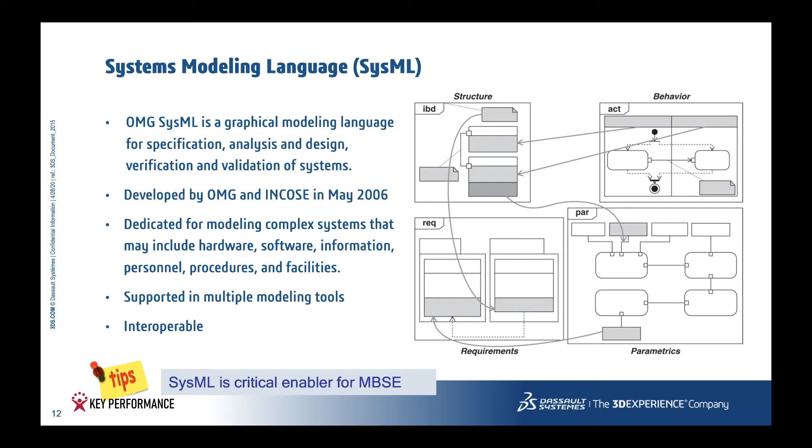And the Systems Modeling Language is the graphical modeling language for specification, analysis, design, verification, and validation of systems. It was created in 2006. It's dedicated to modeling complex systems; whatever falls under the definition of system can be modeled using Systems Modeling Language. It's supported in multiple tools, it's interoperable, and according to INCOSE, it is a critical enabler for model-based systems engineering.

The language consists of 9 types of diagrams and is also categorized into 4 pillars. If you look at what the pillars are, they are structure, behavior, requirements, and parametrics. Let's look into some of the diagrams. Internal block diagram, state chart to define the life cycle of the block, requirements, in this case captured in the tabular view, that's also part of the standard, and parametrics, which is used for mathematical calculations.

So breaking the myth: SysML is too complex. There are many people saying that SysML is too complex for their daily engineering activities. But first of all, we need to understand a couple of things. First of all, SysML is the modeling language only, so it needs to be combined with the methodology to be useful. The other thing is that no open source tool can provide usability equal to commercial SysML tools. So if you apply open source tools, you don't really have the experience of the commercial SysML tool and how easy it is to build models in one of the commercial tools.

SysML is a formal language, so we have to understand that it's not comparable to PowerPoint and Visio. So if we want to keep some level of formality, we need a little bit of complexity. But again, it depends on how precise the models we want to build are at the end. It can be very precise, it can be less precise. It really depends on which level of the systems engineering lifecycle we are at.

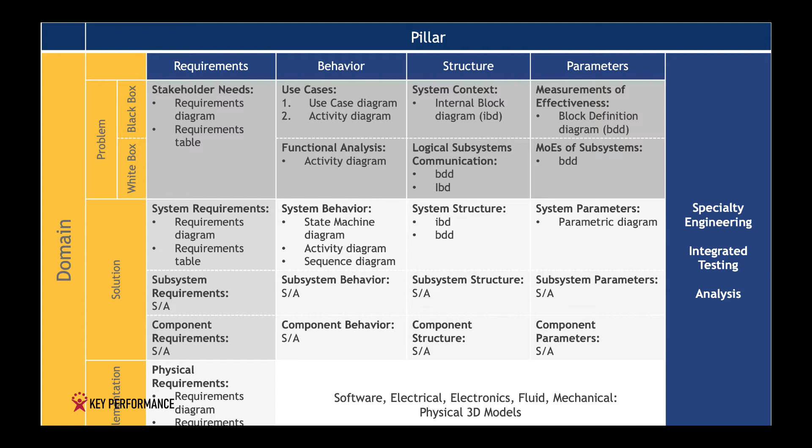And you can see they're repeating because we have, as I said, 9 diagrams in SysML. And it's really important to say which diagram goes where and which diagram we use for what purpose. Because otherwise you can really get lost and start using wrong diagrams for the specific need that you have. So it's important to understand which diagrams we're using for every cell in the grid. And we will, of course, cover that in this webinar.

So first of all, let's talk a little bit about problem domain. We'll start from the black box. The black box analysis is really when we talk about the system as a mystery box. So we don't know yet what's inside the system. And our goal here is to understand what are the main stakeholders, how is the system going to interact with

the environment. We have actors, we have users, we have influencing factors like climate, for example, for some systems, or the road for systems like a vehicle. So we have to take all that into account, and we have to define how all those external entities interact with the system. This is where we really start identifying interfaces. What are the inputs? What are the outputs?

And capture also non-functional characteristics like measurements of effectiveness, key performance indicators, and so on and so forth. Basically, we do what is called and known as operational analysis. Now we will start from stakeholder needs. Well, first of all, the system of interest in the small example is a vehicle climate control unit. And there are a couple of stakeholder needs for the climate control unit.

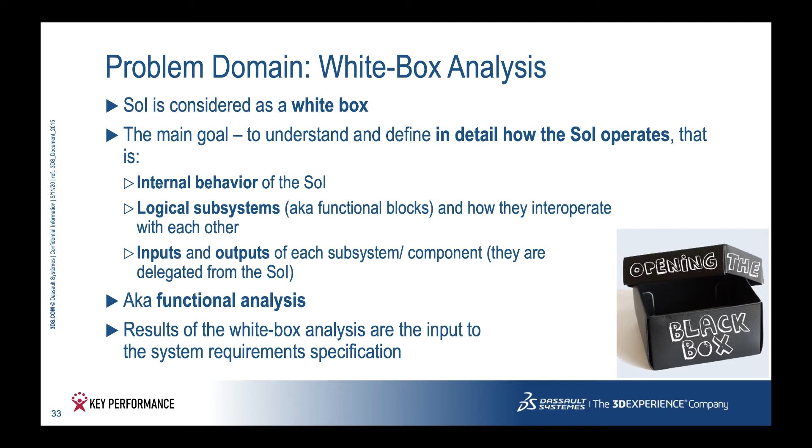Then we go into white box analysis, and this is where we open the black box, this mysterious box, to see what is inside and to start talking about the internal behavior of the system of interest. Start talking about the logical subsystems. So really we define functional architecture, we define logical architecture, and we define the interfaces between the subsystems of the system of interest. And of course, we go and refine measurements of effectiveness. So we assign different measurements of effectiveness or measurements of performance to the subsystems of the system.

And this is where it's important to be consistent between behavior and structure. So we have to make sure we are talking about the same level on the behavior side and on the structure side. So the system use case is related to the context. So a different system context can have different use cases. The system in context can be imagined as different situations in which the system is operating. So if it's a vehicle, for example, it can be in maintenance, or it can be on the road, or it can be in the garage. And these different situations have different use cases.

And then going further, we have the core level functions, and they are the functions of our system of interest in that specific context. Then we go further down, we have sub-functions, we have also subsystems, and so on and so forth. Just we have to make sure we are not going into very deep details. We don't need to go to the physical components here. So we just identify what are the main functional groups, so-called logical subsystems. Some people call them functional blocks in our system. So this is where we start from functional analysis.

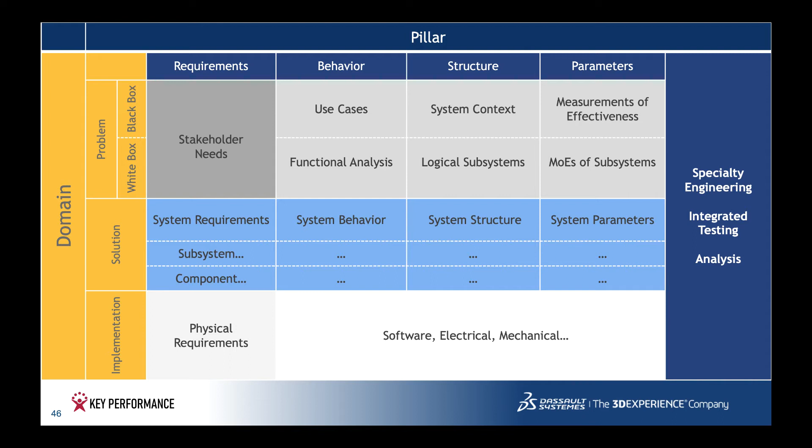Then we go to solution domain. Again, as I mentioned, there can be different organizations working on it. There can be different departments working on it. And this is where we can already start doing trade-off. And this is where we start going more precise. Okay, we're not going physical yet.

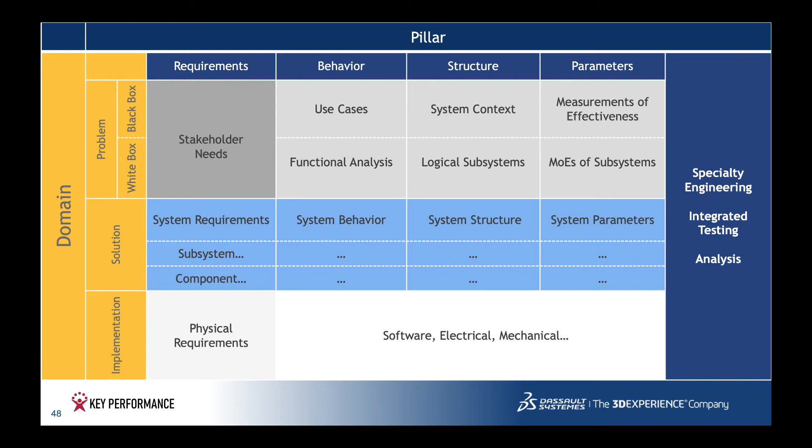So it's very important to understand we are going to create system architecture here that corresponds to the problem that we defined. So from the conceptual, we're going more logical and we're providing more details. And of course, this again helps us to find the best solution for the described problem. And we will go to the system requirements here. This is where we start.

And the system requirements, they are derived from the stakeholder needs. They also refine model elements in the problem domain. So we identify rationale behind every system requirement, and the system requirements have some characteristics like unique identifiers, and also it's really, really important, they need to be verifiable.

So when we talk about stakeholder needs, they don't necessarily need to be verifiable. Sometimes they are raw information, raw text, which we are working on refining in the model. And when we come up with the system requirements, they need to be verifiable. So they need to be very precise statements.

Looking into the example, we can capture them in the diagram. We can capture them in the tabular form that was displayed before. We can capture them in the graph that I also displayed previously, and we can capture relations to the stakeholder needs, of how system requirements are derived from the stakeholder needs. And of course, we can build a nice looking traceability from the stakeholder needs to the system requirements.

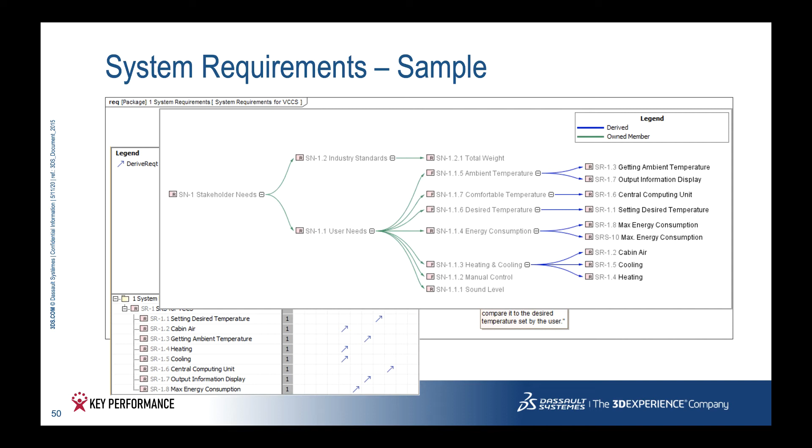And we go to the system structure, and this is where we define the high-level system architecture, which can be different. It can be the same, but it can be different from the one described in the problem domain. In the problem domain, we identify what are the main functional groups, and we treat it as the requirement for the system.

And now when we are trying to propose a solution based on all the inputs that we have, it may correspond and it may not correspond, because additional things may be required, or maybe there's going to be less because some cannot be implemented because of the cost or some other reasons. So really we are proposing the high level architecture in the solution domain.

And here, once we do that, then we start splitting our model into different models for different subsystems. This is where we come up with the work breakdown structure based on whether we are giving it to suppliers or whether we are distributing work to different departments.

So there really can be multiple different situations, but it's important to understand that here we really separate different subsystems into different areas of work, into different projects within the organization. Also so-called work packages.

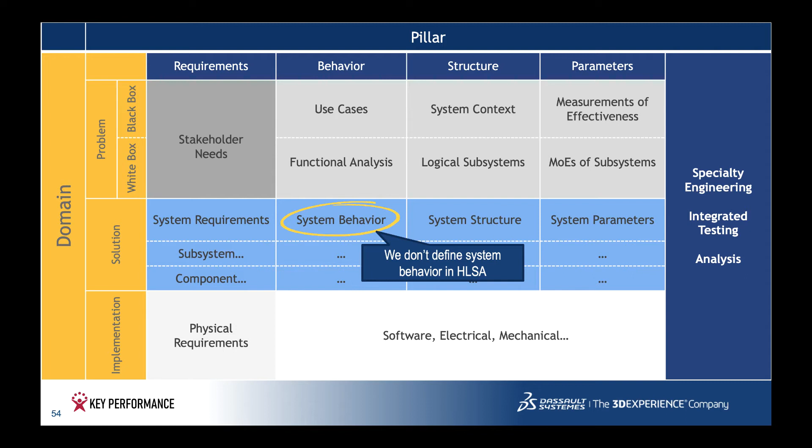So then we go to the system parameters, and at the system parameters, we define methods of how we are going to calculate different KPIs. And we do that in SysML parametric diagrams. So SysML parametric diagrams, they're providing mathematical approaches to calculate the measurement of effectiveness. Okay. And this will be explained in more details when we go to the demonstration.

Then it's important to know the traceability. Traceability is very important all the time. And here we have model elements from the system architecture satisfying our system requirements. So please note that in the problem domain, we are refining stakeholder needs. Here in the solution domain, we're satisfying system requirements. That is an important difference to understand. And this we can capture in the matrix form, where we can say that some interfaces or some system parts or components are satisfying system requirements.

Then we can go to subsystems. The same practices are applied here. We are going into more details, starting from the structure. And here in the structure, we are again applying the same practices. We go into more details for every subsystem. We identify what are the main components, and we go down until we identify what type of components they are. Are they electrical, or mechanical, or software components? And then we can again either choose some components from ones available in the market, or we can contact suppliers and ask for these components. So it really depends on the situation and on the system.

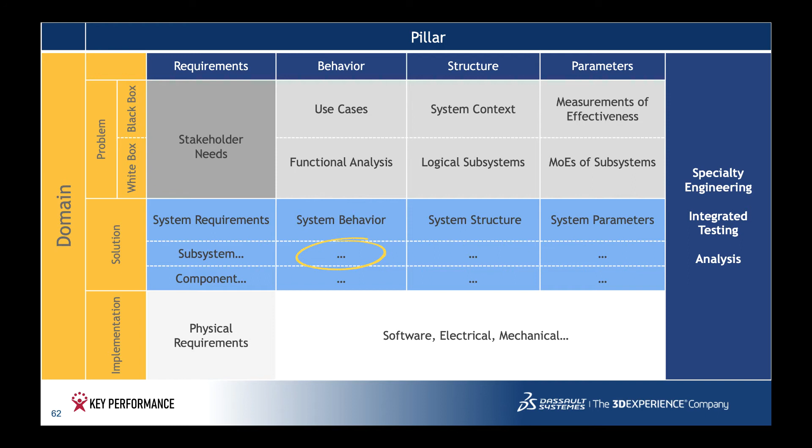Okay, then the system behavior here allows us to define behavior for the subsystems. We can capture it, for example, in the state chart. We can capture the life cycle of the subsystem. At the high level, we can, of course, add some more precise and formal algorithms. We can run simulations. So this is really where we go into more details, trying to understand the behavior of the subsystem or the high-level behavior of components. And if needed, integrate with some more detailed models coming from different sources, like, for example, Modelica, MATLAB, Maple, etc. Now it's demo time.

And it is also time to introduce the modeling software as the third enabler of MBSE, which goes together with the already introduced language and method. Why is the modeling software so important? Because it provides the repository for storing models. Without the repository, SysML diagrams would be just separate drawings, as there would be no underlying model behind them.

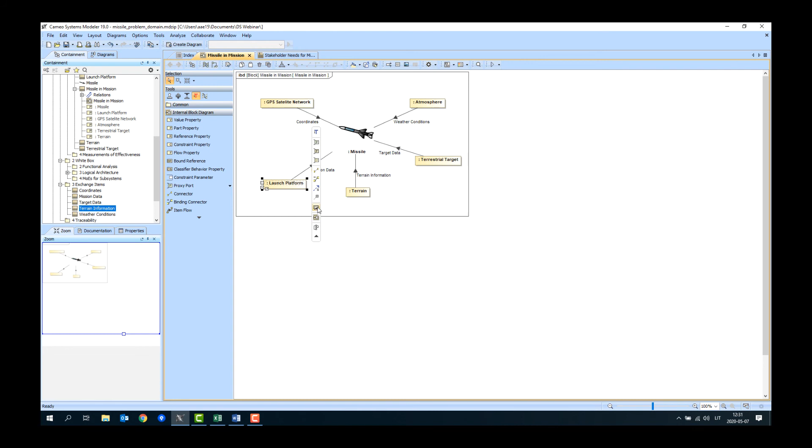I am almost done. Just before moving to the next cell, we can decorate that diagram with images, especially if we want to show it for the people who don't read and don't understand SysML. So the images can be taken from the internet, from your file system, or from the image library provided by Cameo Systems Modeler. So let's change the shape of a missile to the image of a missile. For example, one more, the launch platform. That's it. Now it is much more informative for the people who don't understand SysML.

Okay, let's update the index diagram and move to the use cases cell. Use cases can be specified in the use case diagram. Let me create the one directly under the use cases package. Let's name it use cases of missile in mission. As you can remember, use cases should be grouped by system context. That's why we need to represent the missile in mission system context here on the use cases diagram. I'm dragging it here. And I'm enlarging it because all the use cases will be created within the block shape.

I also need to represent in the use case diagram the launch platform because it is the actor of the missile in mission use cases, and I can display it as an image. Now let me create the use case. Let it be perform mission. This use case represents one of the high-level goals of a system of interest. Every use case must have a scenario, so-called use case scenario, and it can be specified in the model in the form of the activity or a sequence diagram.

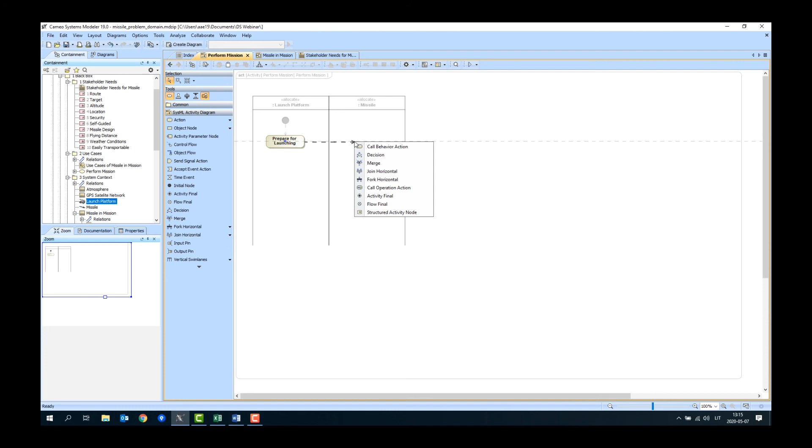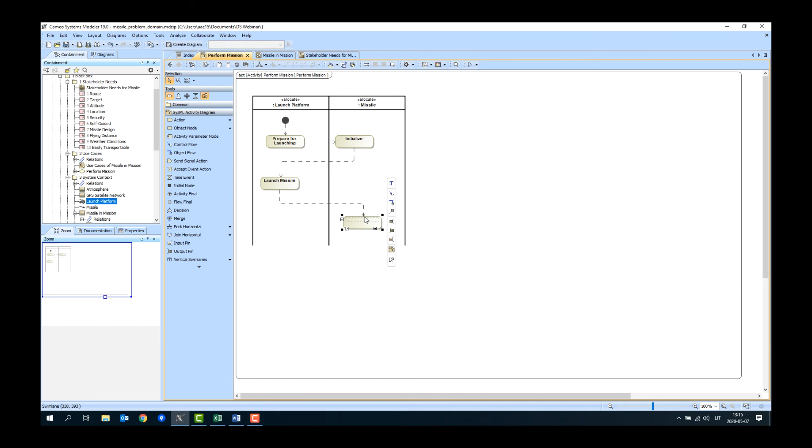And now let me specify a very simple scenario, starting from the initial node. Prepare for launching. Initialize. Launch missile. Missile. Fly to target. Destroy target. Destroy target and activity final.

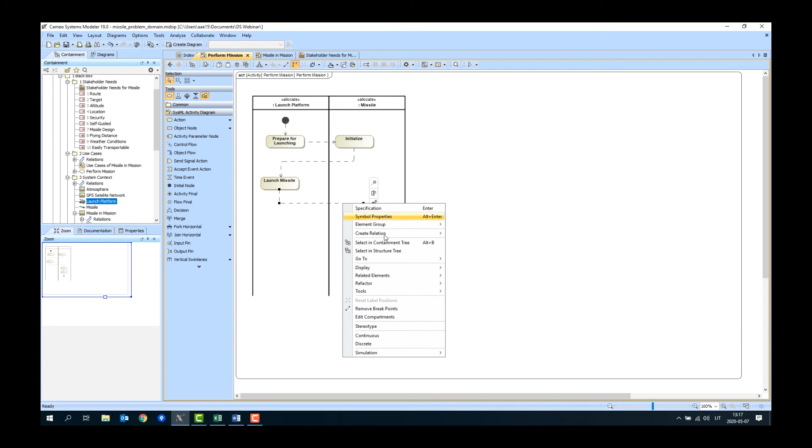Now let's make our diagram more sophisticated. But for this, we need first of all to analyze the missile in mission system context. As you can see, from the launch platform to the missile, the mission data are provided. We need to specify the same information in the use case scenario model. For this, I need to refactor this control flow between the action performed by the launch platform and the action performed by the missile to the object flow. And here I need to find the mission data. The next thing to do is to realize all item flows on that object flow. So now the information is synchronized with the system context diagram.

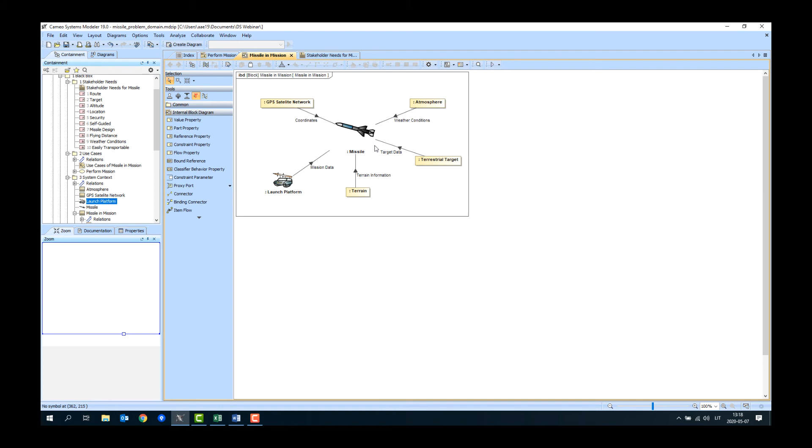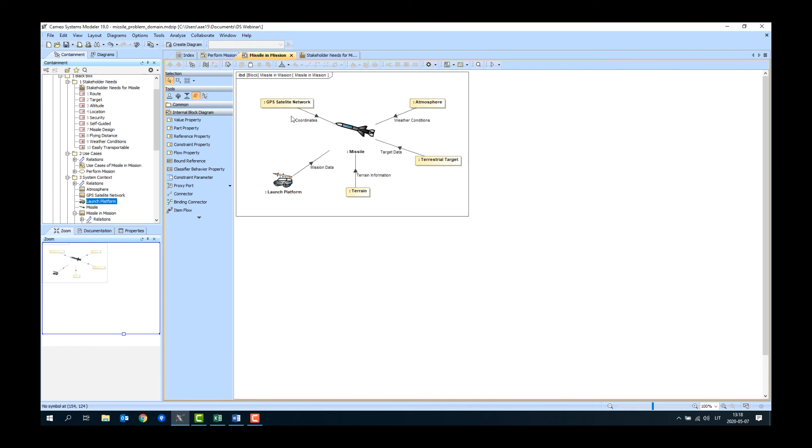But that's not all. As you can see, the missile gets even more inputs from the outside, like coordinates, like weather conditions, like target data, terrain information. So we need to specify the same information in the scenario as well. Due to the limited time, we are not going to do everything, just the coordinates. Okay, let's get back to the activity diagram and let's create the activity parameter node. The activity parameter node type should be coordinates.

And now we need to create the object flow to the fly to target action, in order to specify that the missile performs the fly to target action, it gets the mission data and the coordinates. I want to update the index diagram. First of all, let's drag the use cases diagram and then perform mission activity.

As I'm skipping to capture measurements of effectiveness, I can say that we are done with the problem domain analysis from the black box perspective. Analysis from the white box perspective starts from decomposing those functions captured in the use case scenario that are performed by the system of interest, this time by the missile. So if I go to perform a mission use case scenario, I can say that I should decompose the initialize, fly to target, and destroy target functions. However, due to the limited time, I am able to decompose just one, fly to target.

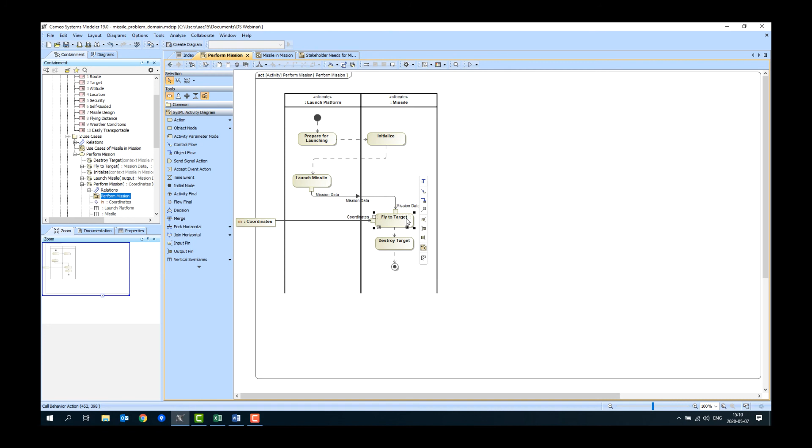For this, I need to create the new activity diagram. Let me do this. The new diagram is created, and as you may see, it already has two activity parameter nodes, which correspond to the input pins of the decomposed action fly to target.

Just before starting to specify the scenario, I need to change the storage location of this diagram in my model, because currently it is stored in the black box perspective, and I need to move it to the white box perspective, because we are already performing the white box analysis. Okay, let me select the entire activity and let me move everything to the functional analysis package. Now I am ready to specify the very simple scenario of a fly to target function.

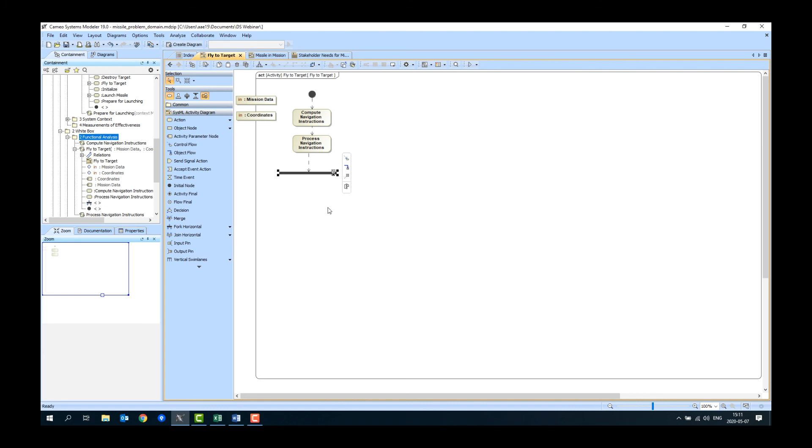Let the first function be compute navigation instructions. The next function can be process navigation instructions. Now I need a fork to split the flow. And I will create three more functions. One, make missile fly at required speed, the other, make missile fly at required distance from ground.

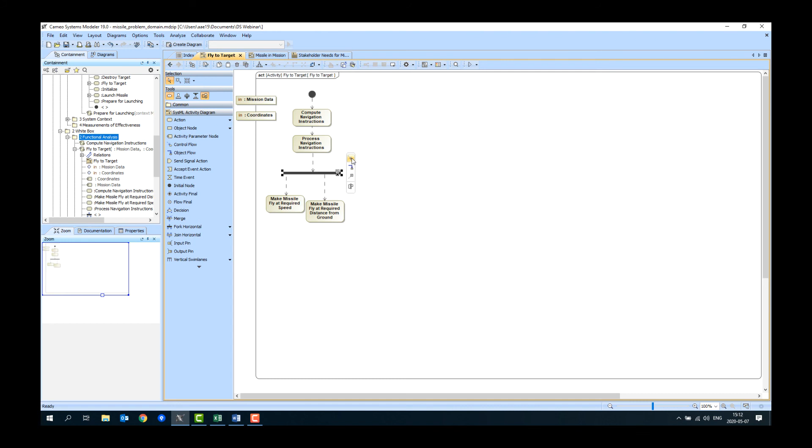And one more function, make the missile fly at required direction. If there is a fork, there should be a join. Let me create one in order to join all the flows into one before finishing the scenario with activity final. And I also need to connect the activity parameter nodes to one of the actions.

Yeah. So I am done with the white box scenario. And this means that I am already ready to specify the logical subsystems, also known as functional blocks of a missile, because the white box functions help me to identify them. But this is the task of the next cell. So I need to move to the logical subsystems communication cell. But before doing this, I want to update the index diagram.

Here it is. Logical subsystems can be captured using a block definition diagram or just BDD. Let me create one directly under the logical architecture package. BDD missile logical architecture. As I have already captured the system of interest in my model when specifying the system context, as you may remember, I don't need to recreate it. I just need to find it in the model and display it on the newly created diagram.

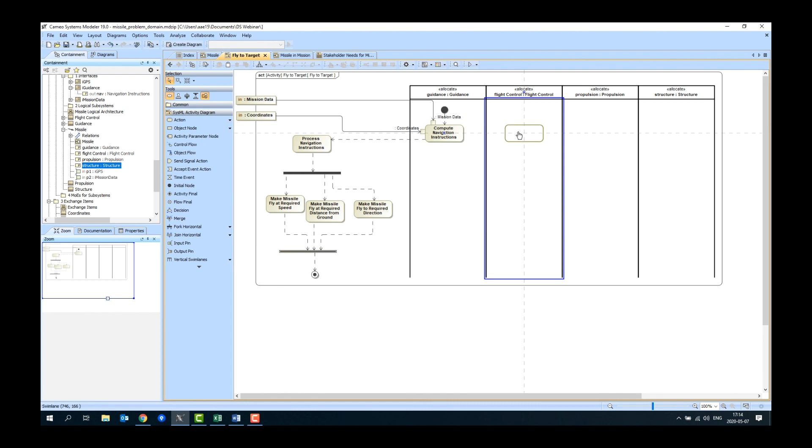This goes to the guidance logical subsystem. This goes to the flight control system. This can also go to the flight control system. This one goes to the structure. This one also to the structure. And this to the propulsion. Here, and finally the activity final.

The next thing to do is to synchronize the item flows from the IBD. This time I will synchronize only navigation instructions, because I don't have more. So for this I am converting the control flow to the object flow. I'm setting the navigation instructions as type for pins. I can simply get rid of types showing on the diagram.

And here I will realize all item flows between those two logical subsystems. So far, it is only navigation instructions, so they are displayed here on this object flow. So this is the end of a functional analysis.